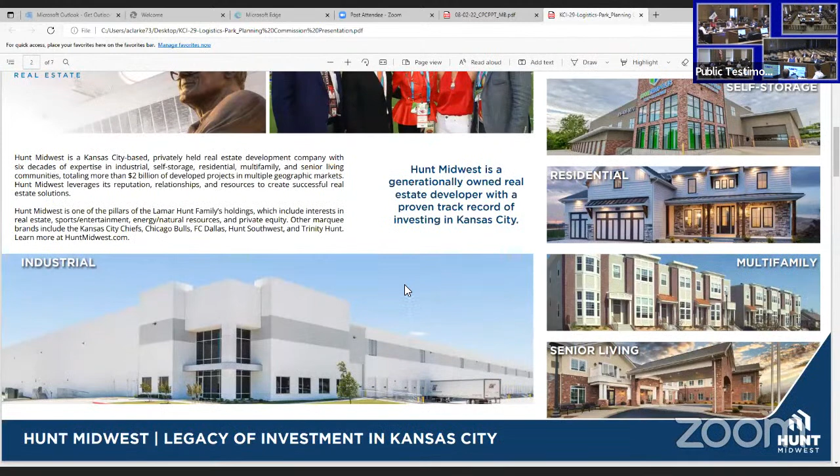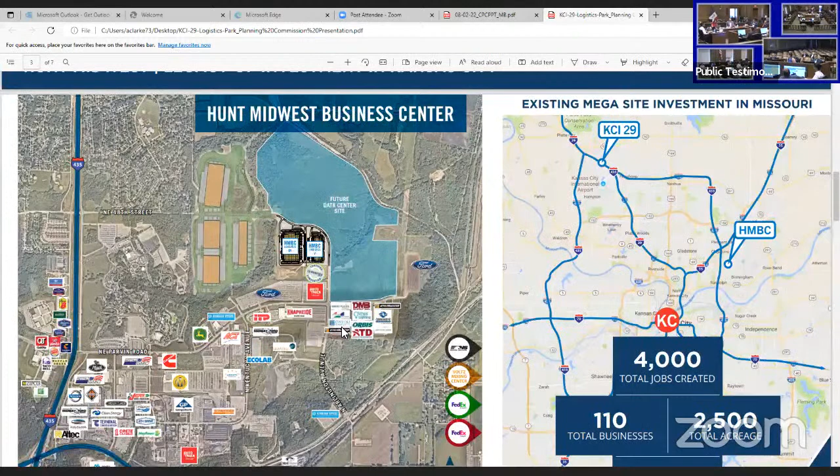Probably our most unique project, very similar to KCI 29 Logistics Parks, is the Hunt Midwest Business Center, located at 435 and 210, very close to Worlds of Fun. This has been a very successful project, started with Lamar Hunt's investment into Kansas City when he brought the football team here in the 60s. Ever since, it's grown into 2,500 acres of a very successful industrial and business center. 4,000 jobs have been created, 110 businesses, and over $1 billion worth of investment.

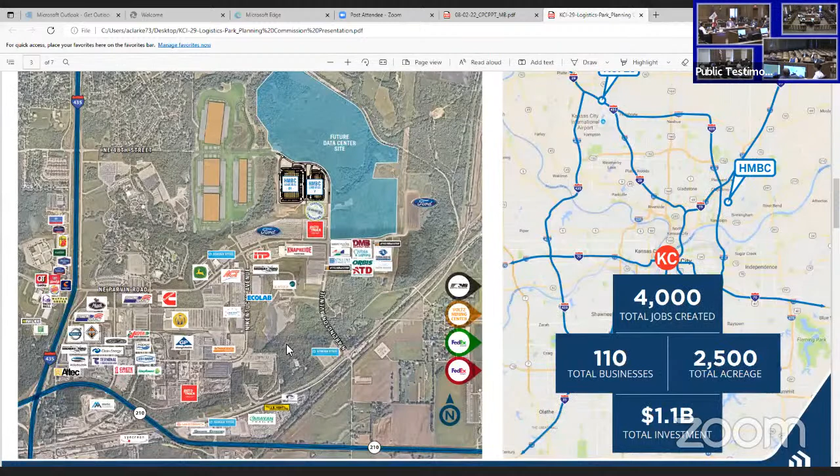So we have a very strong track record of providing quality master plan developments in Kansas City, from an industrial standpoint as well as residential and other standpoints. We also develop industrial projects outside the Kansas City area. We have 14 million square feet of projects either built or under construction in 5 different states. So we have capital to invest in different parts of the country, but we're headquartered in Kansas City, and we want to continue to have our investment here at home.

This project is very exciting. It's a transformative project, we believe, in Kansas City, definitely in the Northland. 2,100 acres owned by a single entity, Hunt Midwest. That's very hard to come by. We believe it's the biggest mega site in the state of Missouri, and definitely in Kansas City. It's centrally located in the logistics hub of the United States. From Kansas City, you can reach 85 to 90% of the population within a 2-day drive. So from an industrial distribution logistics center standpoint, this is just a very key location for many companies.

The uses on the property can include manufacturing, distribution, e-commerce, technology, and other amenities. It's got direct access to I-435 and I-29 and the KCI Air Hub directly across the street. It's not just a piece of ground.

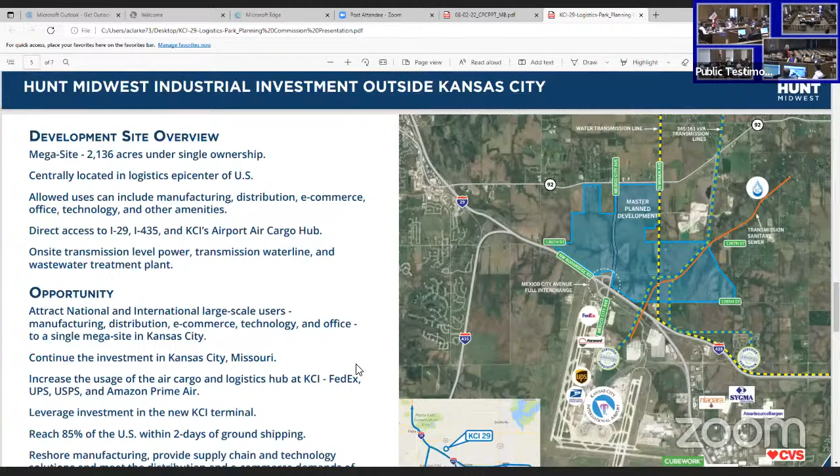It's got utilities, transmission level power, water, and sewer, which is very unique for a property of this size. So really the opportunity is continued investment in Kansas City, but what that means is really attracting national and international large scale users. You read in the news about Panasonic coming to Kansas. This would be a perfect type of project and property for something very similar to happen in Kansas City, attracting users for manufacturing, distribution, e-commerce, technology, and office all in one site directly adjacent to the airport.

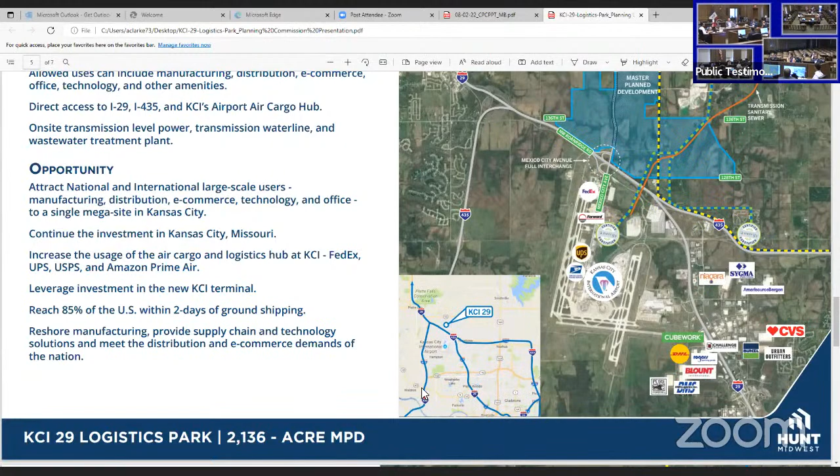Again, continuing our investment in Kansas City, increasing and enhancing the use of the air cargo hub at KCI, and really leveraging the investment the city's made in the new terminal. The city's invested over $1 billion for this project. It's really going to reshape the face of Kansas City, and we feel this project, right on the heels of the new terminal, will be very important and perfect timing.

So I mentioned investment several times, and what's the return on that investment? These are numbers for a full build out based on our success with the Hunt Midwest Business Center. A full build out of this property would be $1.5 billion of private investment, potentially 9,000 jobs, and a $450 million annual payroll. Of course, this is a multi-year project that doesn't all happen at once, but it gives you an idea of the size of private investment that could come to Kansas City because of this project. I've already mentioned the infrastructure with water, power, and sewer available, plus access to the Mexico City Avenue interchange, which is very underutilized right now and has a lot of capacity. It's just a perfectly located property at a great time in a great city.

So the timeline: we're requesting your approval today, and that will go to city council. This fall, we plan to start design for our major infrastructure extensions, and then start construction in 2023.

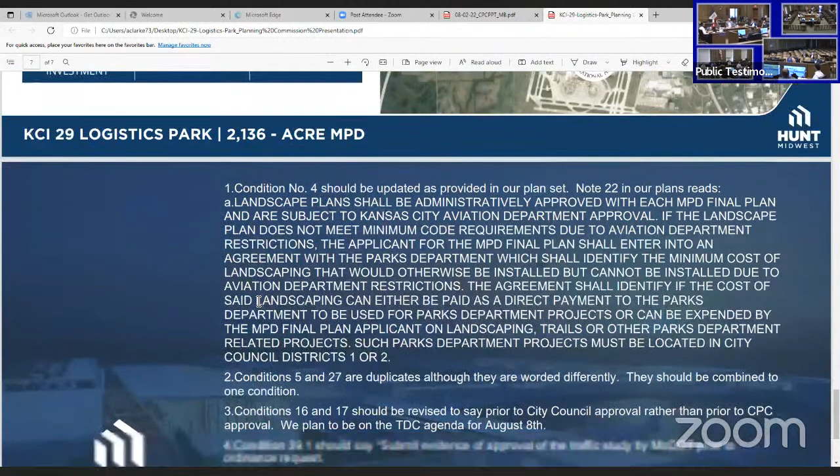As Patricia mentioned, we do agree and appreciate all the hard work staff has done, and we agree with their recommendations for approval. We just have a couple minor tweaks on the conditions.

Condition number 4 is interesting. It does require landscaping, however the landscaping is approved by the FAA and the Aviation Department. Obviously, they don't want a lot of tree cover in this new development, since it would be habitat for birds and increase the chance of bird strikes. So it's extremely likely we'll have a landscape plan that's less than what's typically required for this type of project. Our plan, which we've agreed with staff on, is that if there's a lesser amount required, we take the amount we would normally spend, put a cost associated with it, and give that money to the Parks Department in an agreement. The Parks Department can then use that on a parks project within council districts 1 or 2. So we'll be spending the same amount of money, just meeting FAA guidelines, and what we don't install in landscaping will be used for a park project in the Northland.

Conditions 5 and 27 are duplicates, just worded a little differently. This has to do with the streetscape, which we're not opposed to. We just want to be concise on our conditions for future projects that come in.

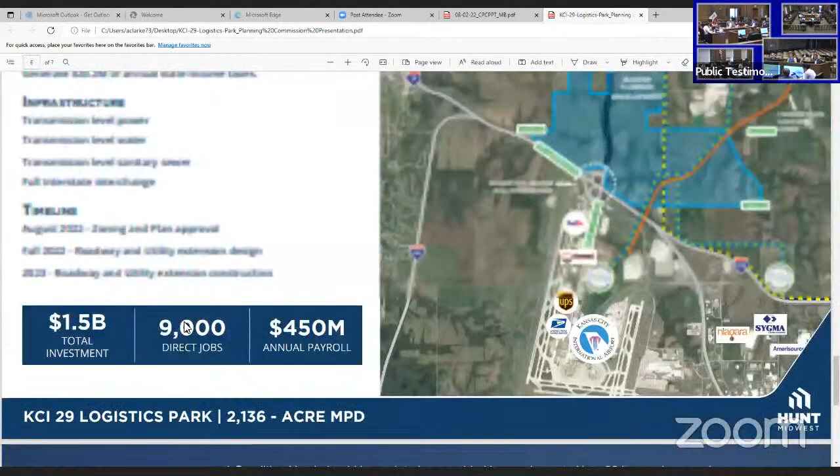I wondered if you could talk about the different phases and what you foresee coming in these phases. Sure, it's a little tricky from a phasing standpoint because you want to come in first off the interchange, but the utilities are kind of in the southeast corner. As I mentioned earlier, we're going to start our design on the infrastructure extensions throughout the site this fall, which will be extended from this area where you have power, water, and sewer to the northwest to hit this interchange. So our plan is to focus our first phase right at the interchange of Mexico City and I-29. It's got the most visibility, and you need to come out swinging with a very successful, visible project. So that's likely where we'll start.

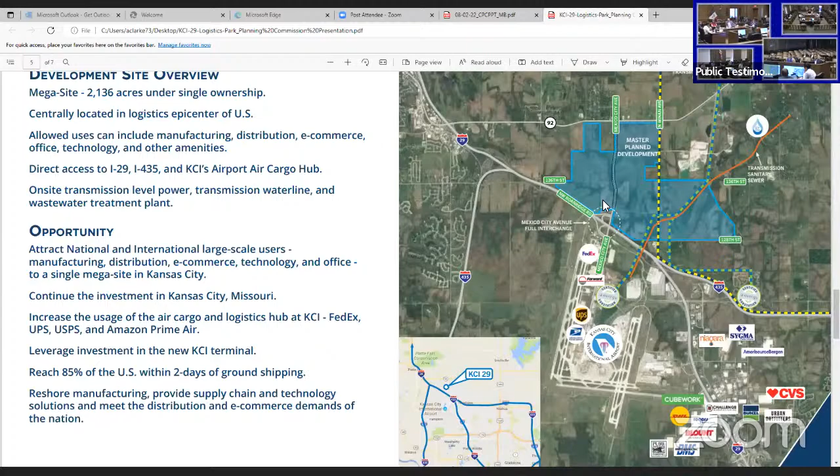So on condition 4, would you be opposed to adding green infrastructure as another option for that funding? That'd be my one major question about the project. I think I like the project as a whole, I think it's a perfect location, and probably really advantageous for you guys as well. So that was my main question, about potentially just calling it out.

I think that's been our go-to, especially since we would probably consider landscape and stormwater as green infrastructure as well. And my second question, not obviously a requirement, but any ideas for solar for these facilities to try to get them as net zero as possible? So yes, we'd be in agreement to consider green infrastructure as part of the overall infrastructure extension through the property. And regarding solar panels, yes, we'll definitely consider that. Really, it's per user - we haven't identified a specific user. Some users would absolutely do that, and we'd encourage that to happen, but until we have a specific user I wouldn't be able to commit to absolutely yes. But yes, we will take that into account.

With these types of projects, do pieces get sold to the users on occasion, or will ownership remain the same for the whole property? Yeah, that's a really good question, and it's a really bad answer - it depends, it can go either way. For Hunt Midwest Business Center, we've done both. We've sold a large acreage tract to a single user, and some of the property we've owned and leased to users. So it just really depends.

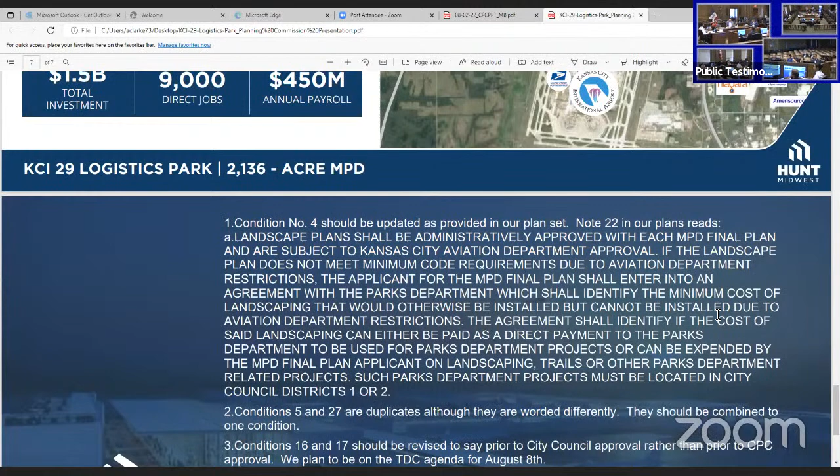Bring a lot of the uses industrial, correct? Like there's some office use, but that would be more accessory to industrial. Yeah, it really depends. If we were to develop this immediately and put buildings on the ground right now, that makes most sense to be industrial. But with a project this size - and this is the exciting part - you'll attract national people looking for headquarters. When some of the larger users in the country were looking for headquarters sites, like Amazon, these are perfect sites for that type of user. So that's why the MPD has this flexibility - if we can land a big whale, a huge office user with technology and manufacturing, we can do that. So a lot of different good uses can happen here.

The other unique thing with this site is that it offers the opportunity to attract basically everything in the supply chain, all the way through manufacturing, technology, office, and industrial distribution. This location, with its utilities, infrastructure, and location, has the ability for us to attract larger businesses and put Kansas City, Missouri, and the state of Missouri in a position to win some of these mega projects you're hearing about nationally. But also, with the mix of site size and road infrastructure, it allows that flexibility to sell and locate at this site, from data center to distribution to manufacturing. My name is Mike Bell, Senior Vice President of Commercial Development.

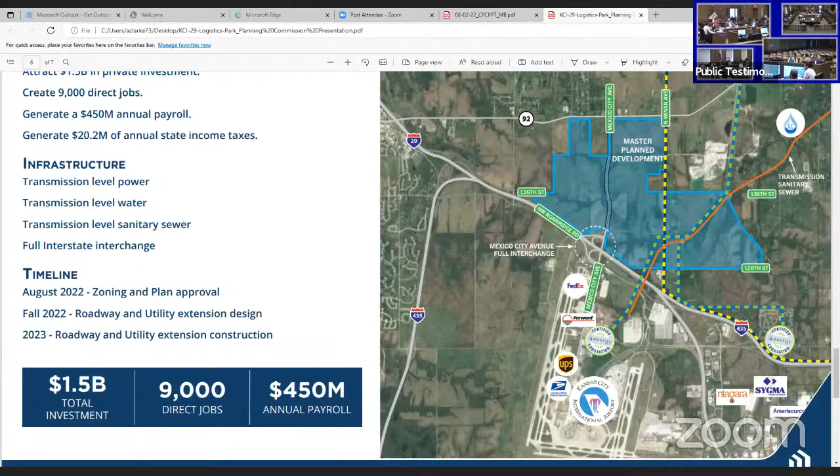With that, I'm going to open it up for public testimony. If anybody would like to speak regarding docket items 3.1, 3.2, or 3.3, please come forward or raise your hand using the Zoom feature. I don't see anybody in the chambers. Is there anybody online that would like to speak? No one has raised their hand, so we'll go ahead and close public testimony.

Any last thoughts, applicants? I guess we'll take a look at the conditions here. I asked Aaron to put this slide up again. Number 4 should change to say condition 39.1 should say submit evidence of approval of the traffic study by MoDOT and the city prior to ordinance request.

He just made it all disappear. That's something I would do. Things were going so well. I have a copy if you'd like that. No, it happened. Control Z. I think I've got some of the notes written down.

So with that, we'll go ahead and close testimony and discussion amongst the commission, or I'll take a motion. I really like seeing on projects like this, us adding that flexibility. I know it's been done before, so I'm excited to provide that flexibility again and have full faith in staff to do a great job making those decisions as they come up.

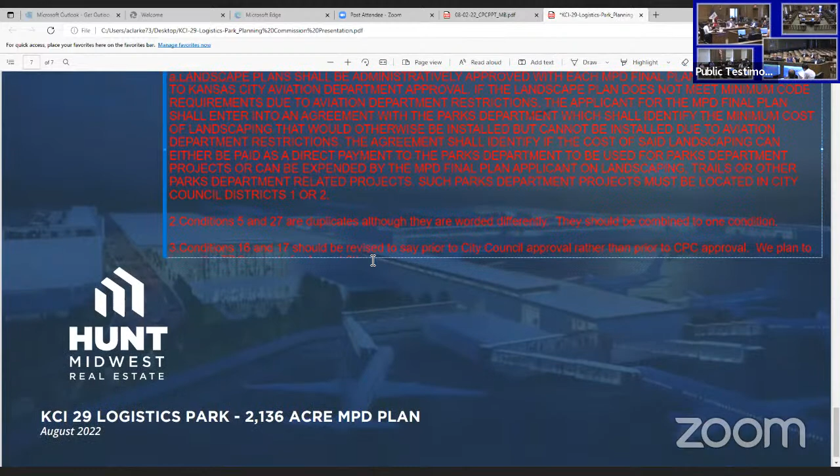Nice job. Chair Crowell, I move to approve docket items 3.1 without conditions, 3.2, and then 3.3 with corrections and conditions, with the following changes: change to number 4, with the option for a landscape fee or payment in lieu of the landscaping. Then we're removing condition number 27 as it's a duplicate of number 5.

And then with conditions number 16 and 17, TDC approval prior to council. Now condition 39, having the traffic study from MoDOT and the city prior to council. Number 49, adding the language that says 'except as provided in condition number 2,' so that those two work together, and then deleting condition number 50. That's 39.1, submit evidence of approval by MoDOT and city, instead prior to council.

Correct. Yeah, I would like to see on number 4 Baker's suggestion of green infrastructure consideration, adding to condition number 4 the option of looking into, with real gusto, green infrastructure as much as possible.

Okay, so we've got a motion and a second for approval of docket items 3.1, 3.2, and 3.3 with conditions amended as stated in the motion. Lisa, can you take roll call, please?

Commissioner Allender, aye. Baker, aye. Crowell, aye. Enders, aye. Rojas, aye. And Sadowski, aye. Okay, looks like the motion passes.

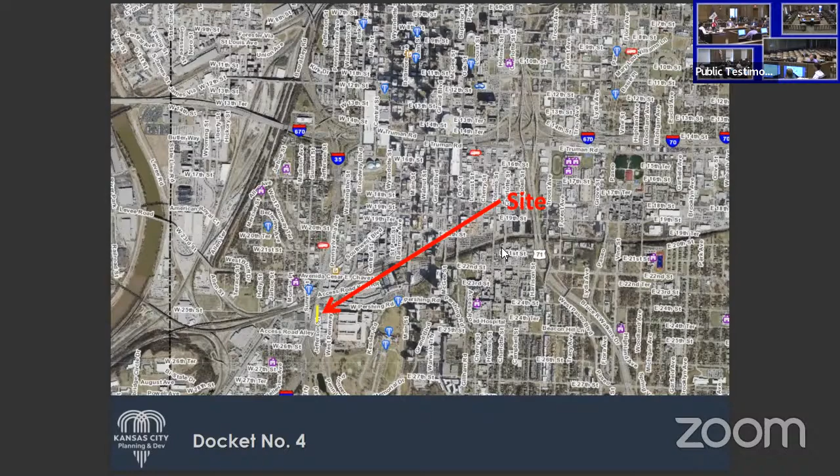The site is located just south of downtown, near Union Station. Here's a closer view of that site again. You can see its proximity to the World War I Memorial and Union Station, as well as I-35. Just one more closer view.

The portion to be vacated is the green section to the left of the highlighted yellow section, which is the Pennway Point future development.

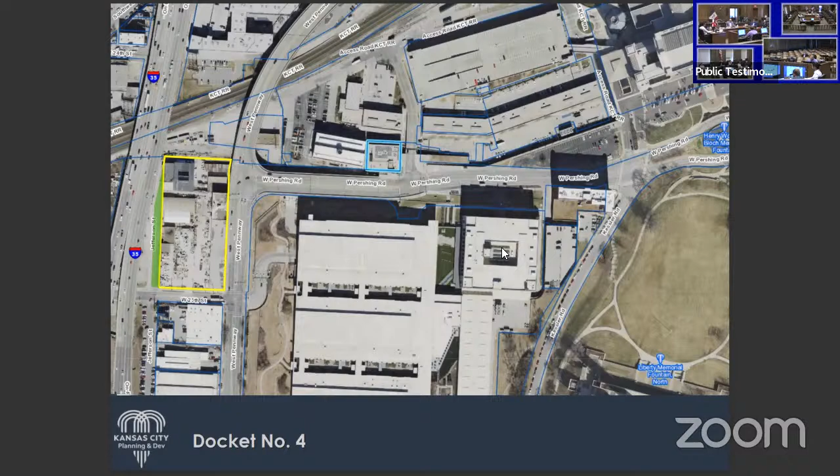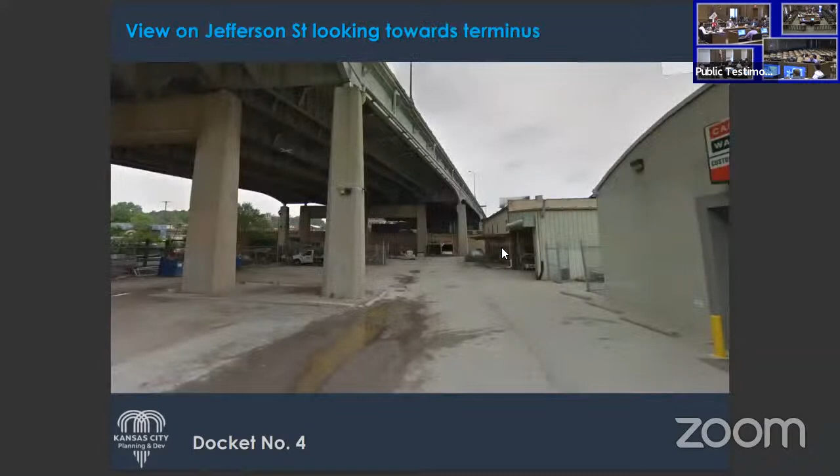Here's just a view from West 23rd Street looking north towards Jefferson. Here is the terminus of Jefferson, it does not connect through at any point, it is just a dead end. It's been a service road for the Carter Waters buildings there, which will be the site of Pennway Point.

So the overall view of Pennway Point that this vacation is for, it's a mixed use development with restaurants, bars, a dog park, a neon museum, connections to the Green Line, and a Ferris wheel. The portion to be vacated will be for parking for the site, which they are also working with MoDOT to vacate the portion under I-35 for additional parking.

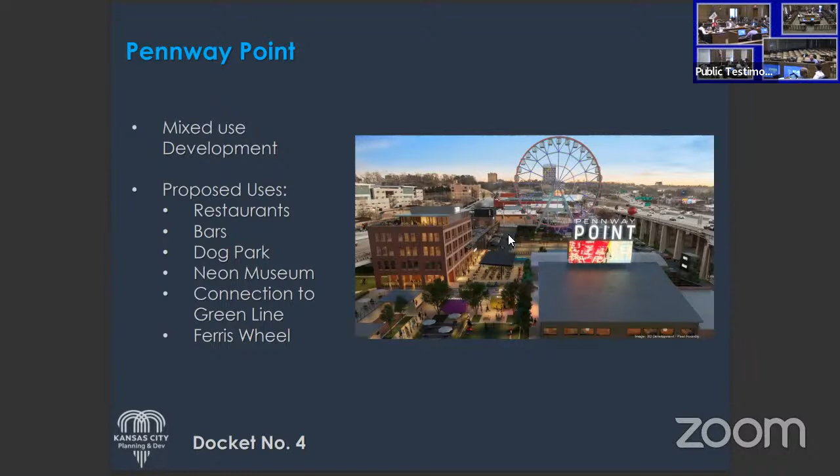City utilities in the right-of-way are to be relocated at the owner's expense, and the applicant received approval from the utility companies who have utilities located in the right-of-way. They also received the required 75% of adjacent owner consent. With that, staff recommends approval with conditions for the vacation of the right-of-way of Jefferson Street north of West 25th Street. I'll take any questions.

Okay, any questions from the commission to city staff? All right, seeing none, let's go ahead and welcome the applicant, if the applicant's available.

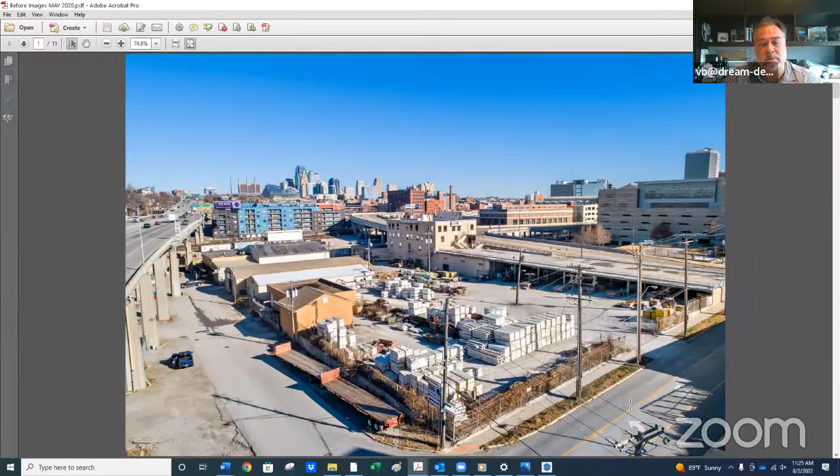Yes, my name is Vince Bryant from Dream Development. Am I able to share my screen? Yes, great. First of all, thank you for hearing this today. I just want to clarify a few things. Number one, this is the former Carter Waters site, which has been construction materials handling for 100 years. Can you see this image I've pulled up? So construction materials, kind of a junkyard. I mean, it's just really been an unsightly 3-acre site right in the middle of downtown.

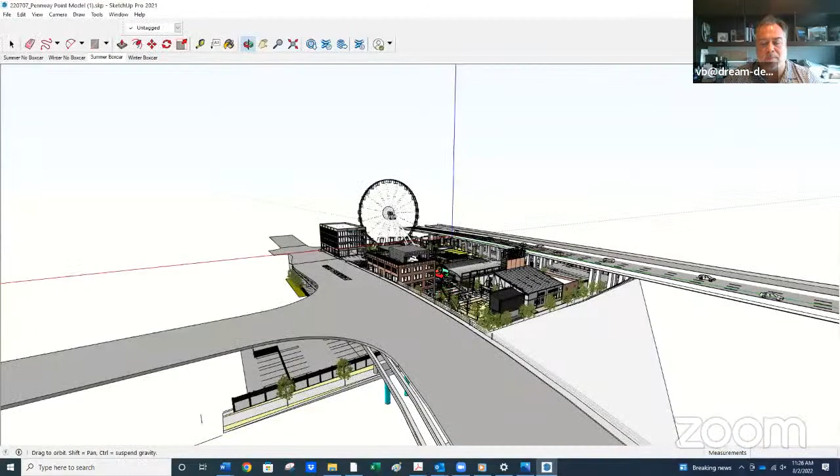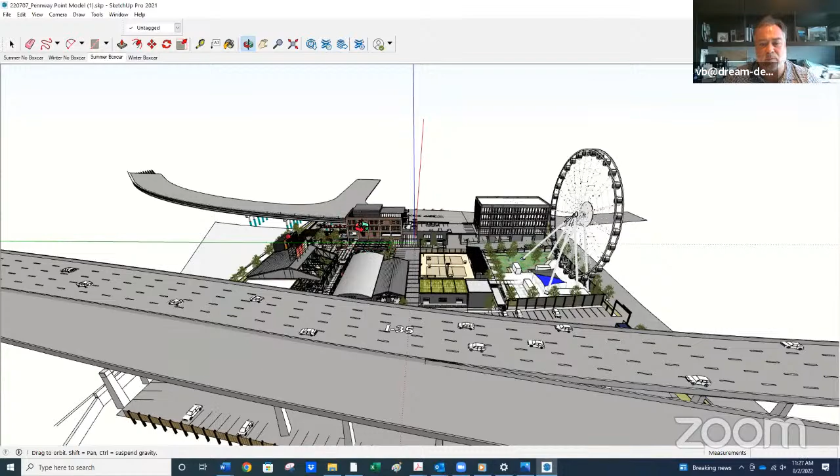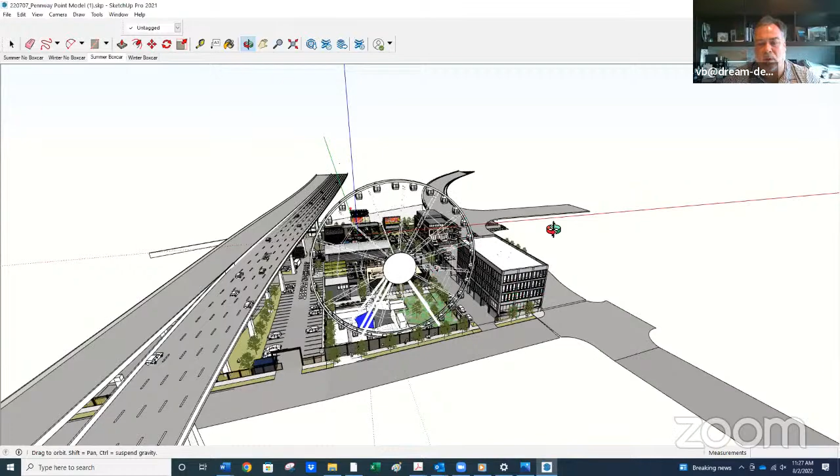You can see the materials are all throughout the site, including under the I-35 bridge. And our plans are to convert this to a family-friendly entertainment district. This isn't another Power and Light District. This is recreation-based entertainment. It's basically an adoption or reimagining of an industrial site, where we aren't just bulldozing all the buildings. We're revitalizing some of these 100-year-old industrial buildings, creating a recreational site with sand volleyball, miniature golf, a 170-foot heated and cooled gondola Ferris wheel, some boutique office, and eventually a new office building on the southwest corner. We have abundant parking, almost 400 parking stalls that we've put together between the 3-acre site, the area we leased from the state under the bridge, as Carter Waters has leased that land for decades, and the area under Pennway, which will also be parking and another access point.

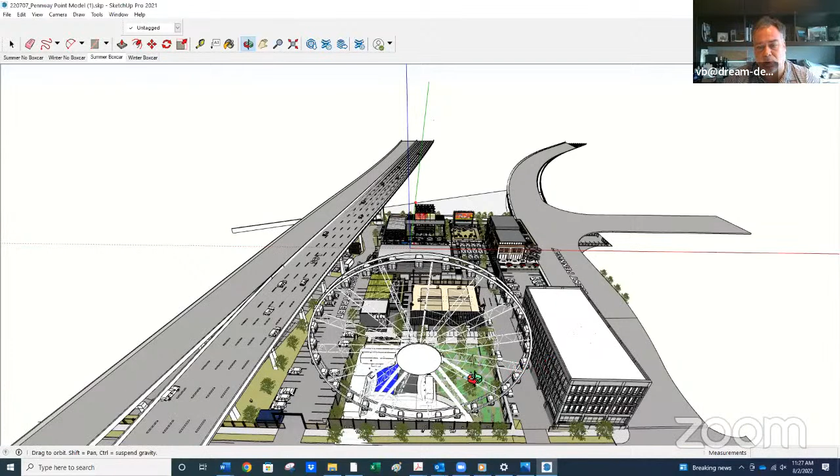So I apologize, Mr. Hernandez, that we haven't come over to see you to talk about this project. This project, M1-5 zoning, has all of the zoning necessary for the uses we're talking about. This is, I think, a huge improvement to an underutilized, unsightly site that sits right on the highway, and we're excited to bring it forward and improve the neighborhood.

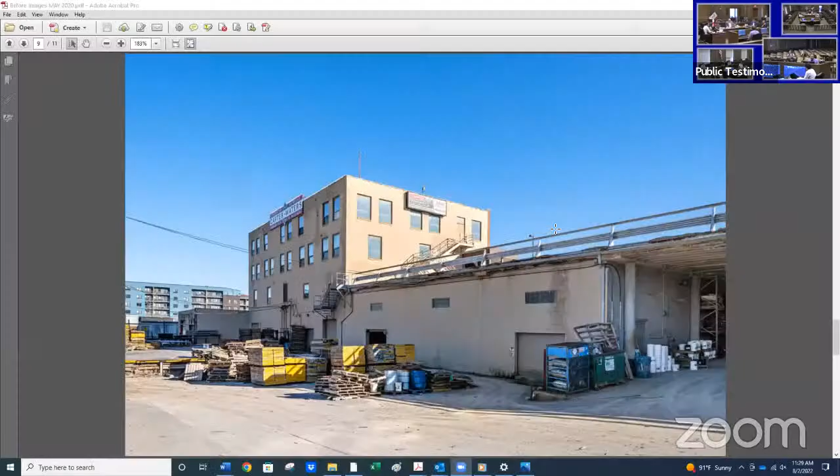Sorry, I closed this model out. I'll show you on the model I pulled up, just fly around a little more. So there are roughly 230 spaces to the west along Jefferson and under the I-35 bridge. There's another 110 spaces to the east under Pennway and Pershing, which I'll show as it pulls up. And then we have a 50-car parking lot that's currently existing on Pennway.

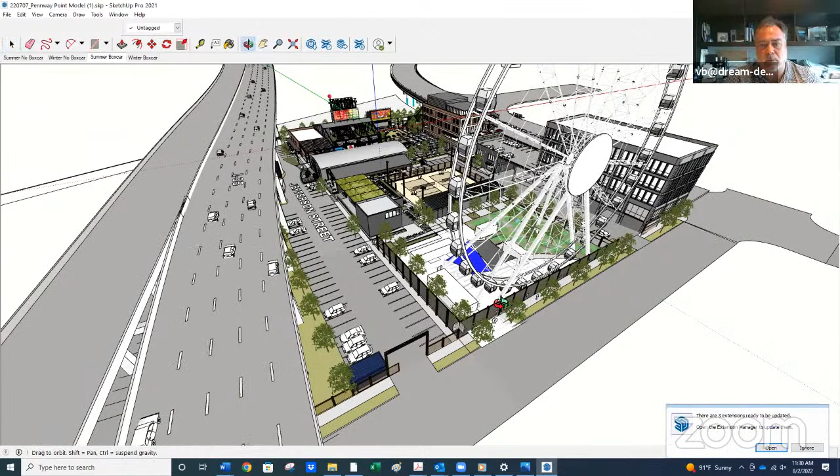Do you already have permission from the highway department to use those 400 spaces under the freeway? Yeah, we've been leasing the Carter Waters lease from the state for decades prior to us. We signed a lease last October for a long-term lease on that same land.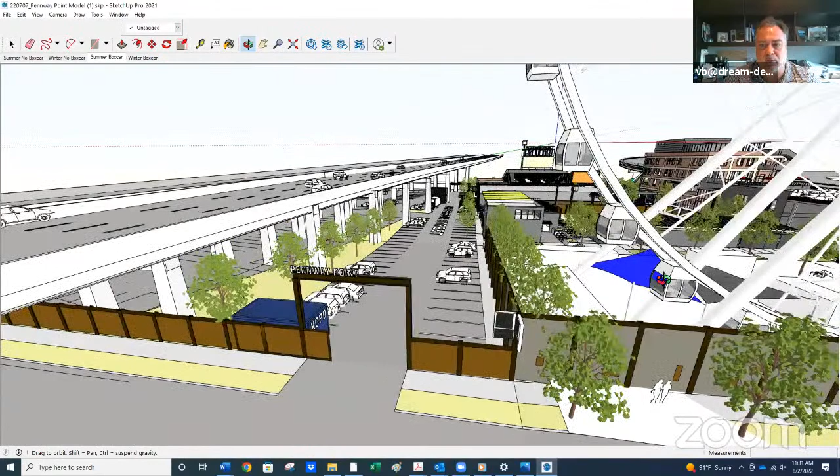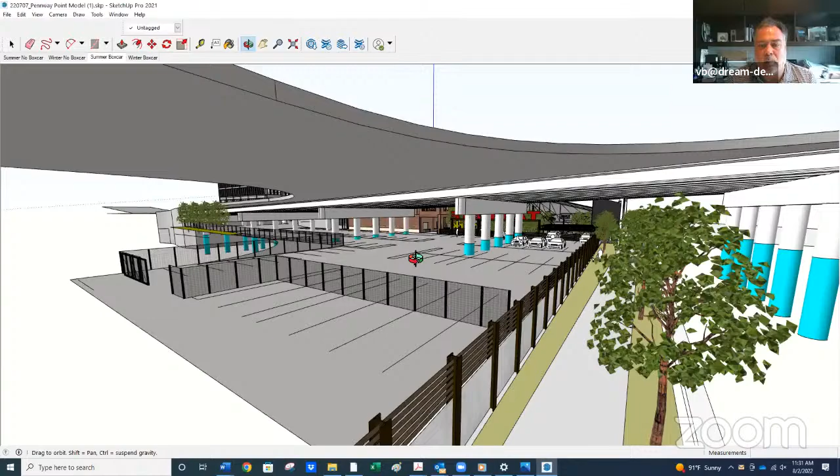Can you guys see my screen? Yes. So we basically have parking along Jefferson, 170 spaces underneath I-35. We have a secondary driveway coming down off of 25th with parking underneath the deck structure and parking on the deck. And then we've got another 110 spaces from an east entry underneath Pershing and Pennway. So it's about the best utilization you could get for these areas under bridges that you can't develop or build on. They're ideal for parking, which makes this really an ideal site for this entertainment district.

Okay, yeah, okay. With that, I'll take a motion, please.

I just had a clarification. So I don't have any issue with the vacation. I was just curious, based on the fact that it meets current zoning, are we going to see this project again? Yes, we will.

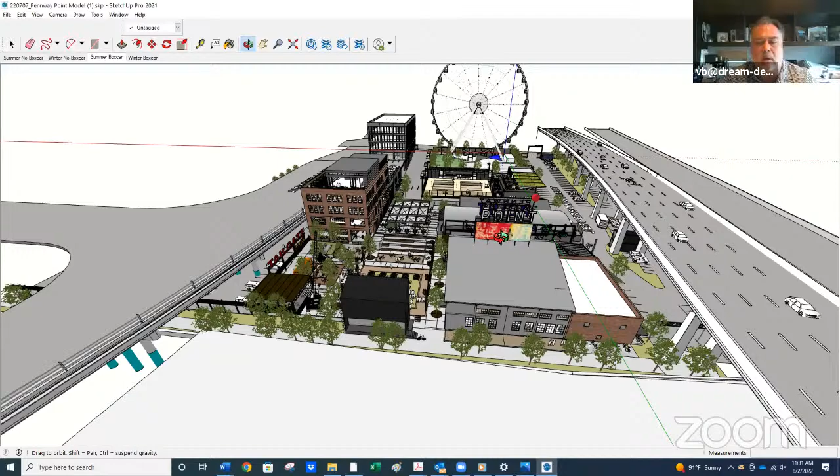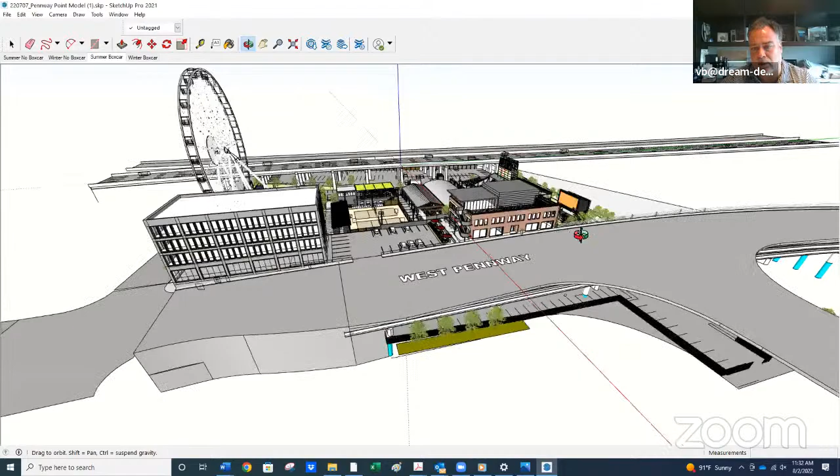It will be coming through a development plan for all the site work, and then each project will be coming through the building department on each project within, including this 4-story rehab building here that looks like 2-story but is actually 4-story. And then a future development plan approval will be required for this new building on the southwest corner. We have already conducted a traffic study showing minor impact to the roadway system here, and we are submitting that as part of our development plan on our overall site approval for uses.

Great. Okay, Chair Crow, I move to approve docket item number 4 with conditions. Second. I've got a motion and a second for approval of docket item number 4 with conditions.

Lisa, can you take roll call, please? Remembering that Commissioner Baker has recused himself. Commissioner Allender, aye. Crow, aye. Enders, aye. Rojas, aye. And Sadowski, aye. Okay, it looks like the motion passes for approval of vacation of the alleyway.

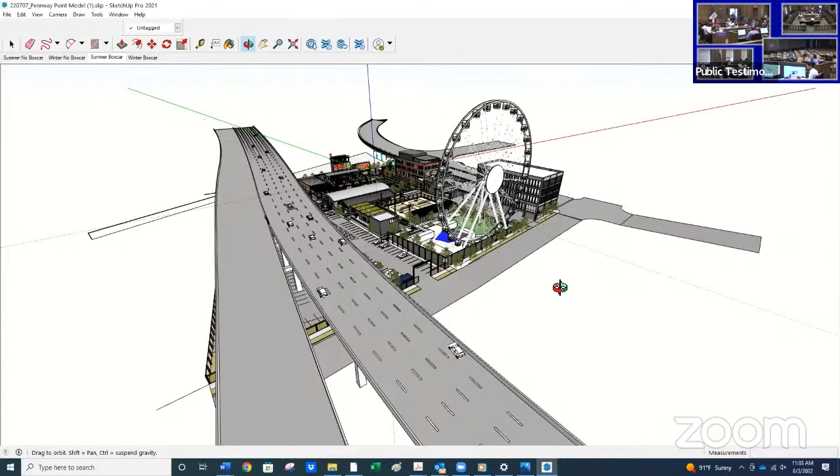We appreciate you bringing it in. Look forward to seeing the full project down the road. Thank you very much. Appreciate the time and approval.

Okay, that takes us to docket item number 6, and I believe we've got to go again. Baker, you need to recuse again? Yeah, okay.

Docket item number 6, case number SUP 2022-00032, the Hope Center. This is a request to approve a special use permit in District R0.5 for the expansion of a religious use and associated variances on about 0.6 acres located at 2800 East Linwood Boulevard. Najma Muhammad is the staff planner.

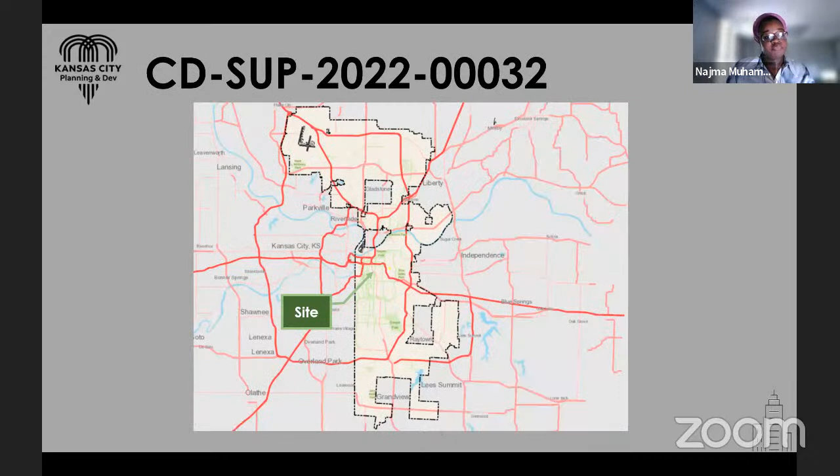Good morning. Before us, we have docket item number 6, CD SUP 2022-32, located at 2800 East Linwood Boulevard. The zoning for this location is split between our R0.5 and our R1.5. The applicant is seeking approval of a special use permit for the expansion of their religious organization under section 88-365-03 of the zoning and development code. It's a little unique in nature, as religious uses and assemblies are regulated a bit differently under the zoning and development code than public and civic use. The subject site is located in the heart of the city.

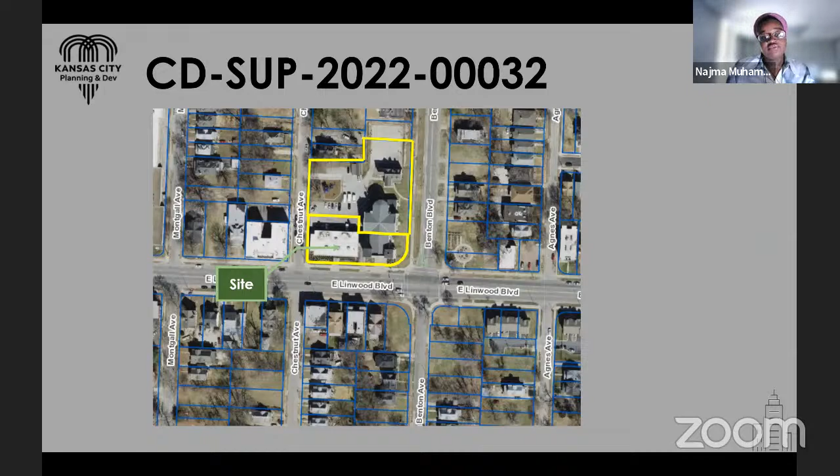This is an overview of the subject site. As you can see, it is currently split between two parcels. A portion of this SUP is for them to be able to join these two parcels together, allowing for three primary uses to occupy one lot. So this would be their already functioning school, the entertainment venue, which is being changed from a church to this entertainment venue use, and their administrative offices. As you can see, the parcel line splits the church in half. Staff saw that it would make more sense to merge the lots rather than try to split them, to allow for the now entertainment venue and office to be on one site, because of the location of the water service lines.

So the current structures, they aren't changing apart from a small expansion to the east of the church to make a bathroom. The Hope Center will use the current landscaping that they already have to meet the code's request for landscaping on the property to accommodate all of their uses.

The parking will be approved via variance. They don't have all of the parking they need. However, they are able to operate currently with the parking spaces they do have. So along with those credits and the possible variance from Board of Zoning Adjustments, they will be able to make those parking arrangements. And if not, they will have to go through an alternative parking compliance plan.

Staff again determined that merging of the parcels would be best for this site as to not cut the water lines. And there is a condition, there will be work between water services and the Hope Center to come up with an easement for this line.

Again, the use will change in the church building from a religious assembly to an entertainment venue. These are all considered eleemosynary uses, and so they're able to occupy the space because of their relation to the religious organization of the church in the residential zone.

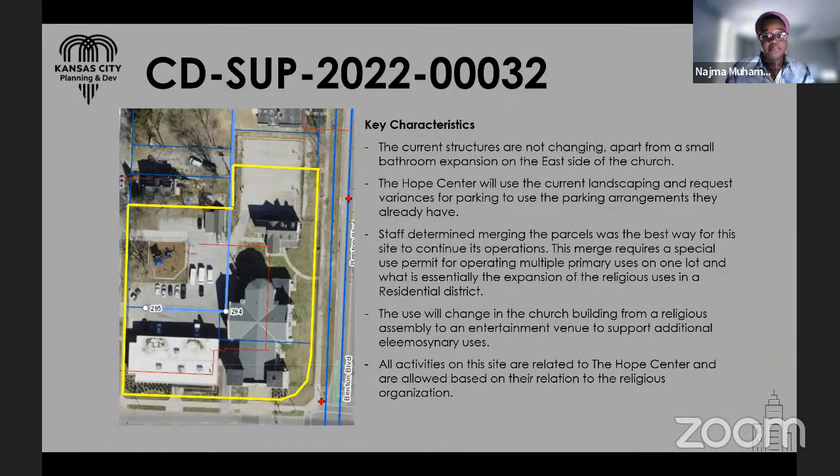Whereas if they weren't related to the religious organization, they would not be able to occupy this space in a residential zone. Again, all of the activities on this site are related to the Hope Center, and that information on their validity as a religious organization is attached to the staff report. Staff recommends approval with conditions, and that concludes my staff report.

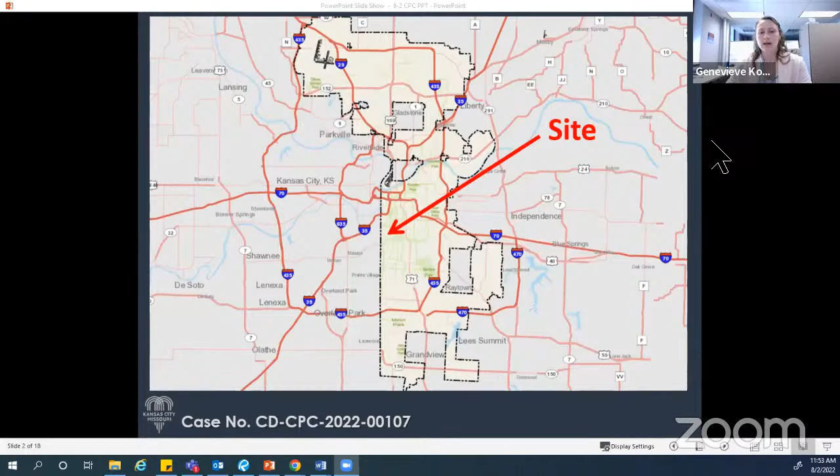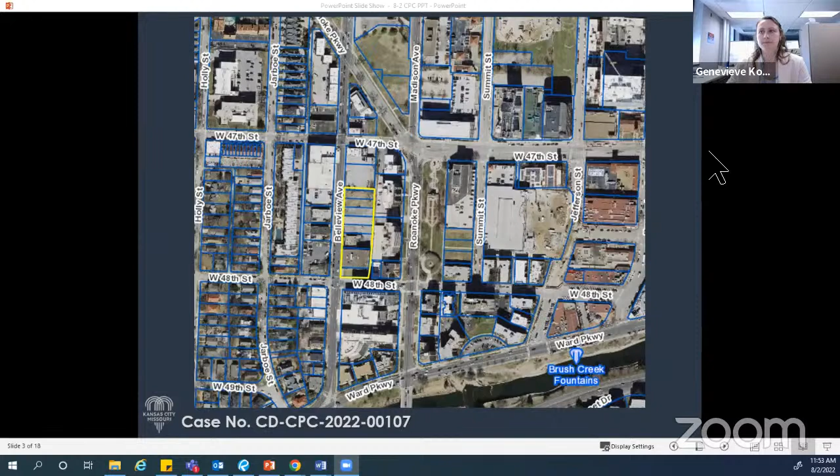The site is generally located in the Midtown Plaza area. The subject site is outlined in yellow and contains 8 parcels. The Country Club Plaza is just a few blocks to the east. Here is a closer view of the subject site.

The zoning on the northern 7 parcels is MPD, and the southernmost parcel is zoned R1.5. There was a previously approved MPD zoning and development plan for this northern portion of the site. However, the applicant for that previously approved project was a different project, still residential, but as you know, the MPD is the zoning and determines what is allowed to be built.

So this applicant has come in proposing to rezone this entire site in order to allow for the development they are proposing, because as you've seen driving on Belleview, nothing has ever been constructed from the original MPD.

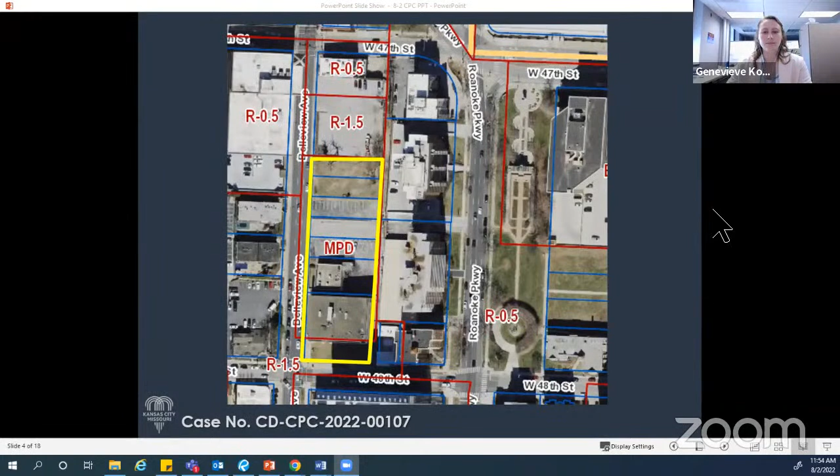There was a traffic impact study submitted with this project, proposing that West 48th Street to the south of this development area be 2-way traffic. It is currently 1-way traffic. That is still under review, and I can provide more information about that later on.

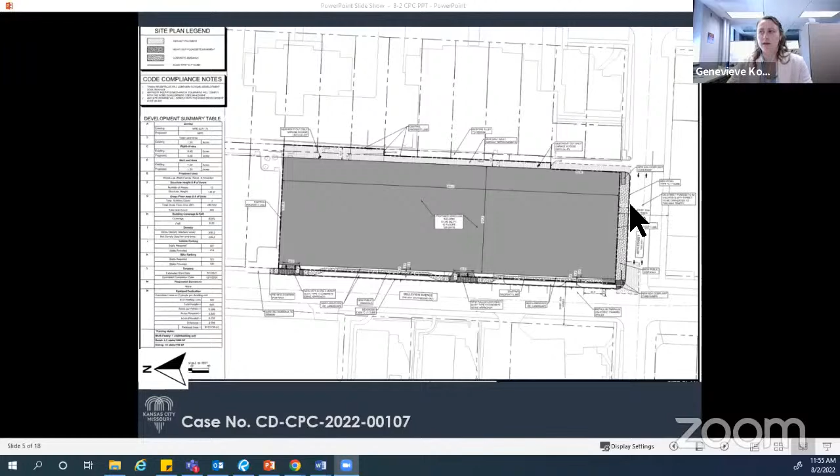I'm going to show a couple of floor plans to give you a better idea, since this is quite a large building and it's on a hill. The tall part is the northern portion of the site, and the bottom of the hill is to the south, so there's a lot of different uses on different grades.

This is the next level up. So now we are at grade for the highest point of the hill. There's another entrance here to the parking.

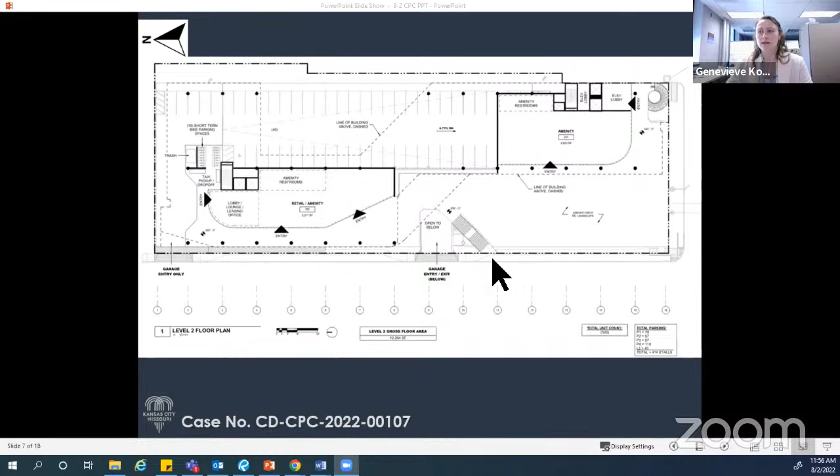And then this is where we get to the amenity deck area in this portion of the site, with some retail and amenity area. There are stairs from the sidewalk, so we're technically going up to above grade here, which will be a little more clear when I get to the renderings.

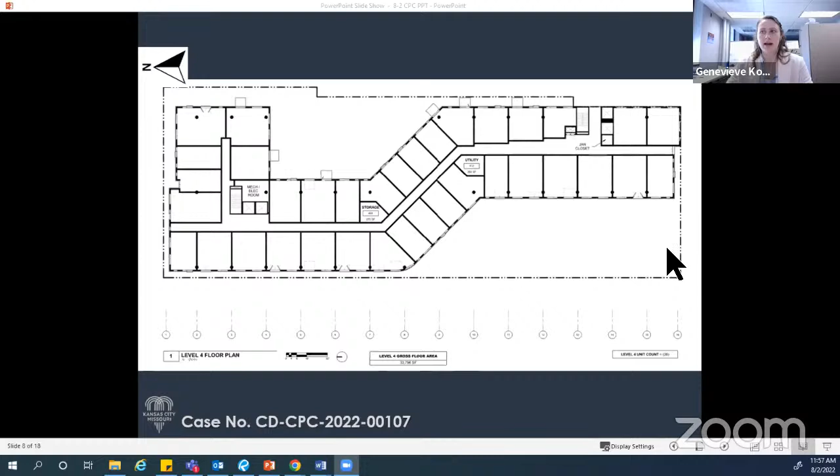This is showing how the building shape changes once we get up to where all the residential units are located. It takes this curved shape, whereas on those bottom levels, it takes a more rectangular shape to include the amenity areas and retail spaces.

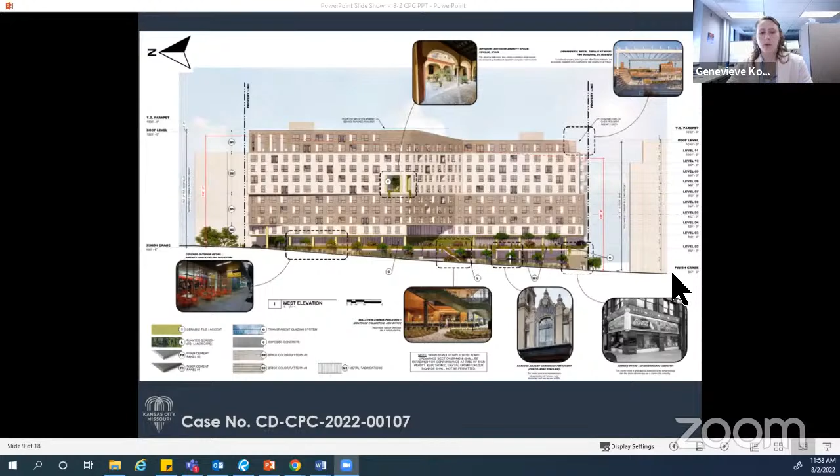I want to point out that this property is not located within the Bowl Overlay District. Therefore, this 130 feet line is only a recommendation and is not required by code. Additionally, the proposed zoning to MPD allows for flexible lot and building standards and does not really have a height maximum. I will say the applicant has worked with staff to bring the height closer to that recommended 130 feet, and that included reducing the number of units. As you heard, there were 338 originally proposed, and now we're down to 320.

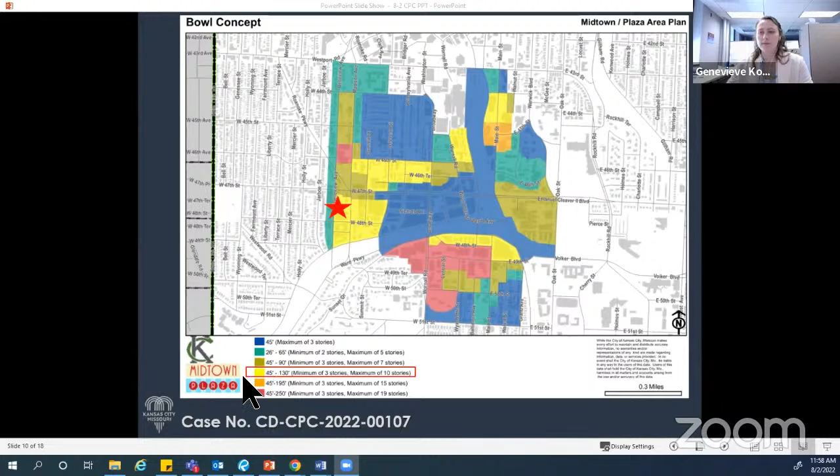Here's the map from the Midtown Plaza area plan. The site is the star here, within the yellow area, indicating a minimum recommended height of 45 feet and a maximum of 130 feet.

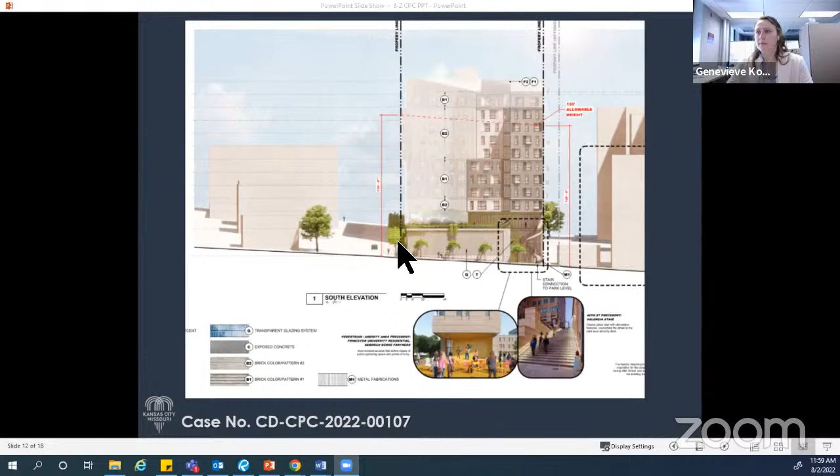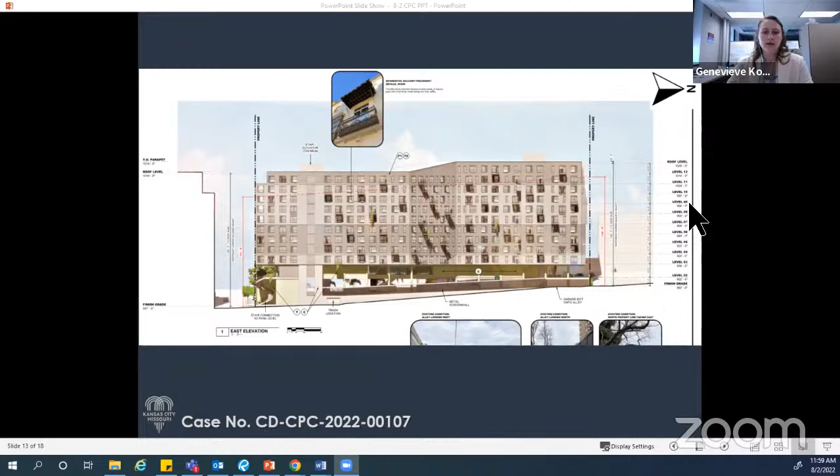So there is quite a bit of difference in heights here, and the applicant can discuss that further during their presentation. I have just a few more elevations. This is what the side of the building from West 48th will look like, primarily taken up by residential on the ground floor. This is the back of the building facing internally towards the block. And then here is an image of what that amenity deck will look like.

Hopefully it makes a little bit more sense now. You can see the stairs that come up from the sidewalk. So this is sort of a second level.

I also have this rendering which highlights the areas that the applicant has made adjustments to in order to get closer to that bowl concept, including step backs, both depth-wise, I believe on the 7th and 11th floors, and then also from the side, just to reduce the domination of the architecture here. And then here's that amenity deck again.

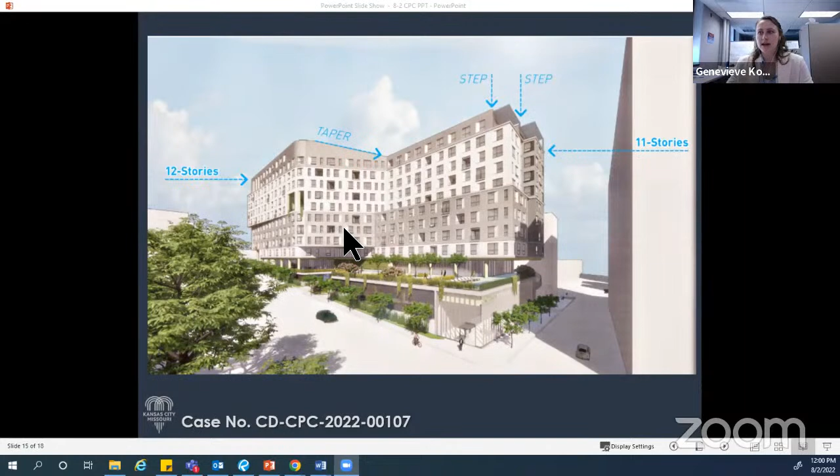So lastly, I just want to point out that the applicant has been working with the neighborhood organizations and Historic Kansas City to also review this project. I know the Historic KC group recommended the applicant implement increased and/or additional step backs from what I've just shown you and what city staff reviewed. The applicant would like to implement some additional changes of step backs.

So I'm requesting that the commission add a condition for the applicant to submit these revised plans prior to the request for ordinance. I just wanted to make you aware that the plans that go forward to council approval may not be these exact plans you're seeing today. They might be slightly different, and the applicant can speak to that as well. Otherwise, staff recommends approval with conditions to this project. And I can take any questions.

Okay, any questions from the commission to city staff? Regarding the traffic study, with the street currently being one way and the effort to make it a two-way street, is it possible that a traffic study with the one-way street as is would show that it's sufficient, or was it known that the one-way street is not sufficient as is, and therefore the only option is to make it a two-way street?

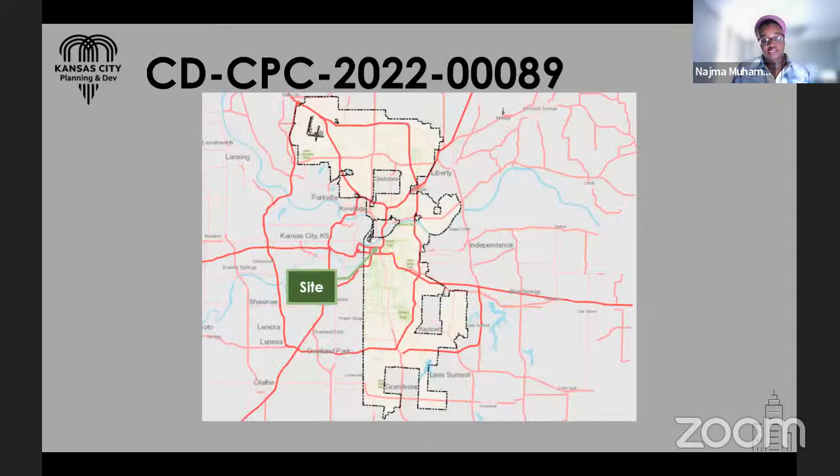Good afternoon, everybody, once again. Before us we have docket item number 10, CDCPC 2022-89, located at 500 East 8th Street. If you drove in today or walked outside City Hall, you've likely seen this building before. The applicant is seeking approval of a development plan for the conversion of former offices to 263 residential units with underground parking. The former AT&T office building is surrounded by Admiral Boulevard, East 8th Street, Cherry Street, and Locust Street in all directions, so it's a street-bounded building. The subject site is located downtown, not too far from City Hall.

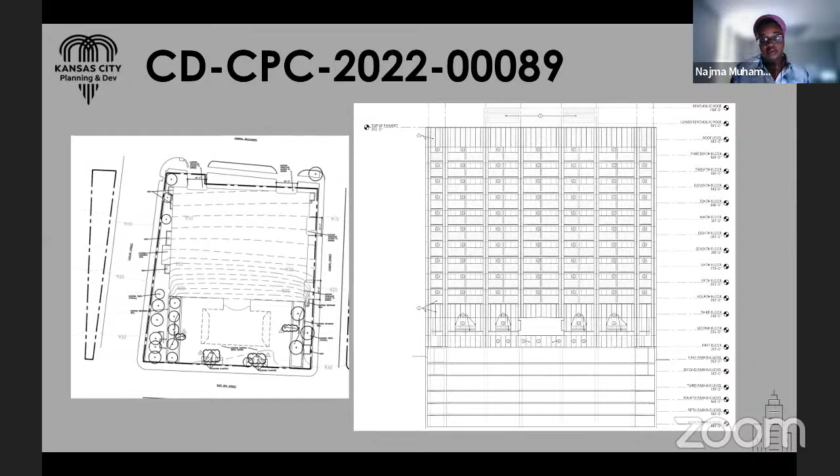This is an overview of the landscaping currently there that they will use to meet staff requirements at this location. This is an elevation of the building showing the multiple stories that will be converted into apartments, and the 5 stories of parking that will be used to meet both bike and vehicular parking access. This is a utility cabinet on the top of the building that they've agreed to resurface with new paint as they update the interior and exterior of the building.

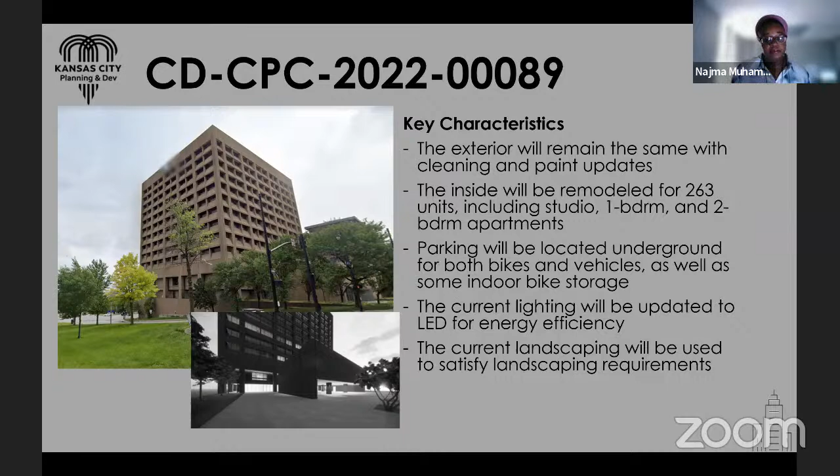Some of the key points: the exterior will remain the same. The applicant has assured me that though the recesses of the building may appear to lack light, the building actually receives plenty of light, and I will hopefully follow up with a tour to see what that looks like. The inside will be remodeled for 263 units, including studio, 1-bedroom, and 2-bedroom apartments. Parking will be located underground. The current exterior lighting will be updated to LED lighting for energy efficiency. And again, the current landscaping satisfies the landscape requirements required for this development. City staff recommends approval with conditions, and that concludes my staff report.

Okay, thank you. Any questions for staff? Okay, seeing none, let's go ahead and welcome the applicant then. The applicant's available. Mike, you need to accept the promotion.

We're still waiting on the applicant to accept the promotion. Yes, and you seem to have disappeared altogether. Didn't scare him away, did you? I hope not. Okay, he's back. Perfect. And he's been connected.